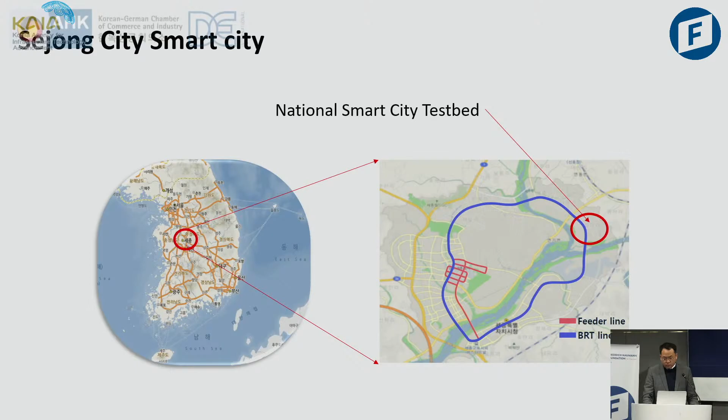Okay, so I want to introduce Sejong City first. Sejong City was originally designed as a new capital city of South Korea. We wanted to move our capital city to the Sejong area, but right now it is just a government complex, meaning that all the government offices are surrounded by this Sejong City. One more strength is that around Sejong City, most of the research institutes in South Korea are located in this region.

And the National Smart City Test Bed, you can see on the right figure, it's just one district, marked in the circle. So in this area, we're going to build a new city. The city will look like this.

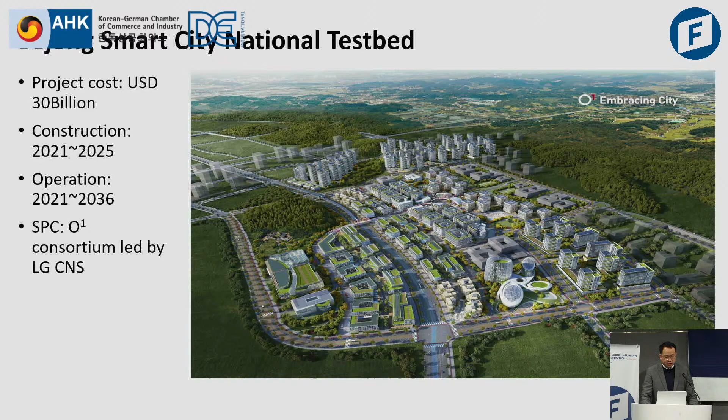The total project cost will be around $30 billion US, and the construction period from next year will be about 5 years. We're going to start operation from the year 2021 to 2036, and the business will be done by the O1 consortium, led by LG CNS.

In this area, we're going to propose 5 mobility services. The first will be personal mobility, using electric kickboards and bike systems. Then we will introduce shared mobility, autonomous shuttles, and demand responsive transits. And one more is smart parking.

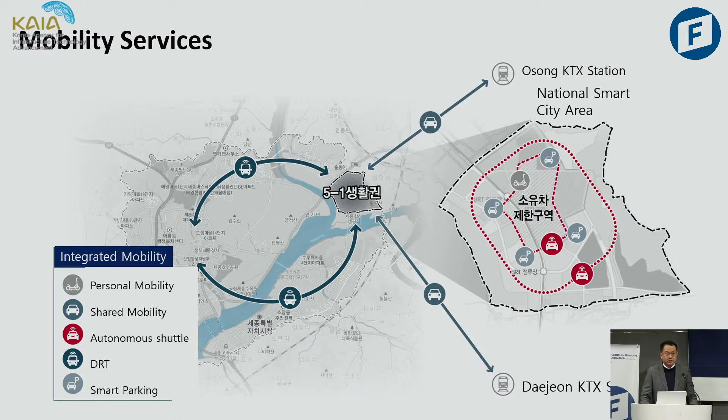In the 5-1 district, this is the smart city testbed area. Based on this area, we're going to plan the city transportation systems, and later we're going to expand the experiment to the whole Sejong City.

At the core of our effort, we have O1 link. This is an implementation of MaaS - mobility as a service, which I think European people are very familiar with. Using just one single application like O1 link, you can reserve, pay, and plan your trips. So with O1 link, we're going to provide multimodal services to everybody.

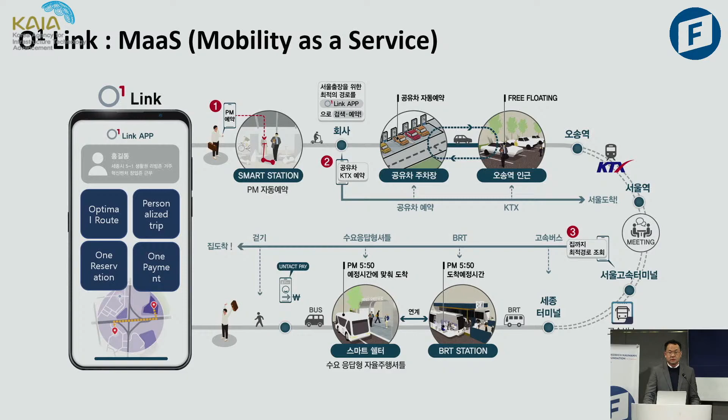From the 5-1 testbed location, one good thing is that we're going to open this O1 link platform to everybody. Meaning that if you are running a business and want to provide more mobility services, you can also use O1 link and join our network.

Under the O1 link apps, we're going to build the O1 mobility brain. This is the system that optimizes transportation and mobility using AI, cloud, and big data. I think this O1 mobility brain is the core concept of O1 link and this smart city.

So we're going to implement a mobility simulator to find the optimal travel, and also we're going to predict future demand and future traffic, and provide these services to the people.

Using O1 link, you can plan your intra-city travel using the 5 mobility services, and these services will be combined and integrated with the existing services in Sejong City, like the BRT (bus rapid transit), bus systems, and taxis. This will also support intercity travel.

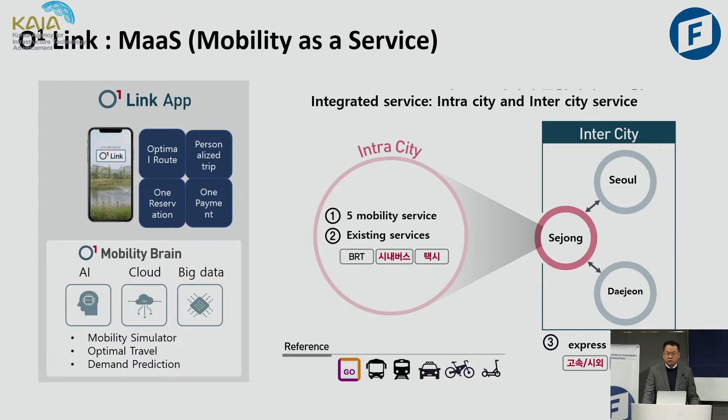So if you want to go to distant cities like Seoul and Daejeon, you can still use O1 link. Using O1 link, with just one click and one app, you can reserve everything.

For personal mobility, we already have some operated - some bikes, some kickboards, and micro mobilities. To improve the safety of micro mobilities, we're going to build a personal mobility roadway, separated from the pedestrian way, where bikes and kickboards can use this roadway.

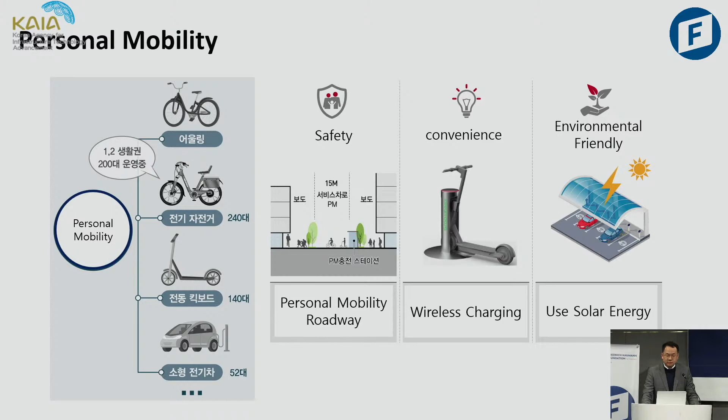For convenience, we're going to use wireless charging systems, and we hope that all the energy for electric bikes and kickboards can be provided by solar energy. What we aim is that the total energy consumption inside this testbed city - we think 40% of total energy demand can be provided by solar energy in this city.

To connect to the vicinity area - actually in South Korea, Uber-like service is prohibited, it's illegal. So we want a little bit different type of shared mobility. We're going to use rental car services. Around this area we have 5,000 rental cars available.

Using these rental cars, we're going to connect them with O1 link, and then people living in this testbed city can go to the vicinity area using these rental services.

We can also provide a one-way trip with free floating services, meaning you can just arrive at the destination and leave your vehicle, and the handler we hired will handle that vehicle so that they bring the vehicles back to the stations.

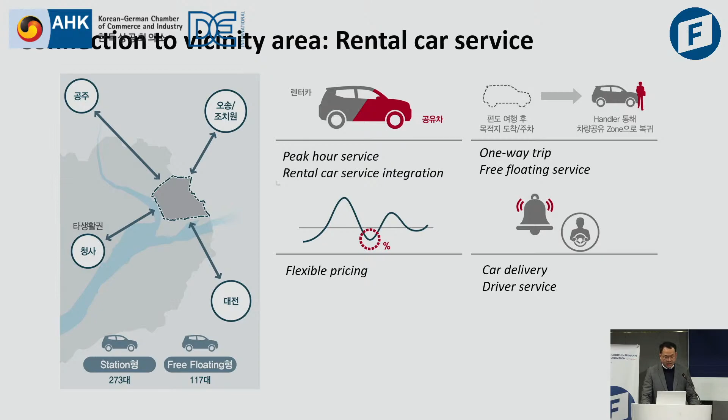We're also going to have more services like car delivery and driver services, and we're making flexible pricing strategies. We have two types of these services: the station type, meaning you can go to the station and get these services, and the free floating type, meaning you have to find the vehicle using the O1 Link app, then leave your vehicle anywhere and the handler will handle it.

And there is one more thing: the autonomous shuttle services. Inside this area, we are planning two autonomous-only lanes, and around them we're going to first run the shuttle services. This area will be connected by C-ITS services from the national government, using infrastructure-to-vehicle communications so vehicles can get more information from the infrastructure.

Along this roadway, we're going to install many sensors. We are designing a smart pole, which is a combination of sensors. We're going to use CCTV cameras, and LiDAR or radar if needed. That information will be delivered to the driver or the vehicle so they can avoid dangerous situations like collisions.

For security purposes, we're going to use blockchain-based security. We will also make a smart shelter bus station, which is an O1 link accessible point. So if you just go to these bus stations, even without any apps, you can reserve the services and get the service.

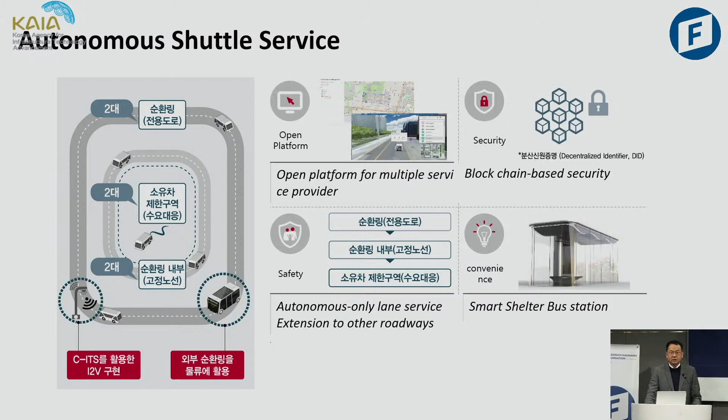These autonomous-only lane services will not extend to the whole city, because we aren't sure the safety is guaranteed yet. So we're going to do more experiments one by one, and once we have enough reliability, we'll extend these services to other roadways.

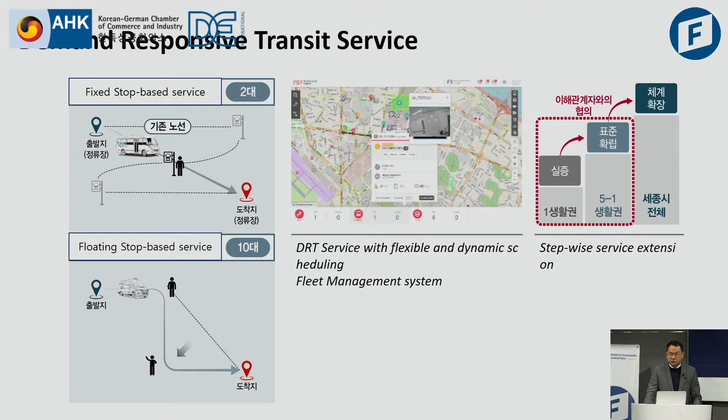We think one of the killer applications of mobility services is the demand responsive transit service. Demand responsive transit means you call the transit service, it picks you up, and delivers you to the location you want. We have two types: fixed stop-based services, where you go to a fixed stop location, and floating stop-based services, where you can call from anywhere and be dropped anywhere.

Initially, we are starting with 12 vehicles, but later, after analyzing demand and mobility situations, we're going to increase this number so we can provide the services to the whole of Sejong City.

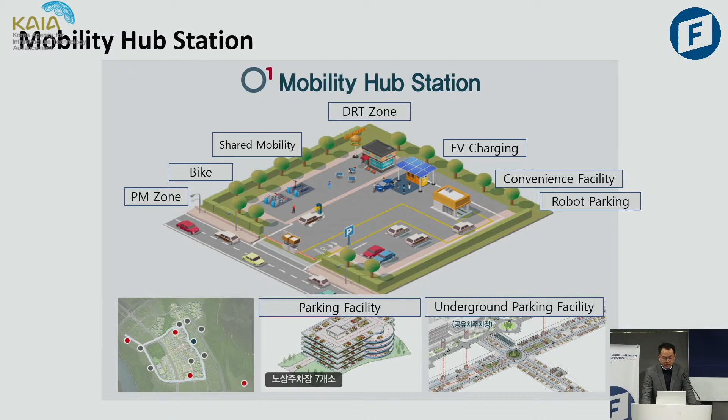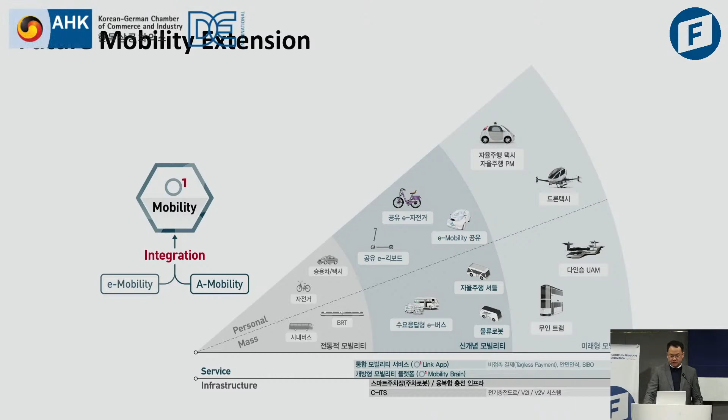Up to now, we are just starting with 5 mobility services, but later we're going to extend these to more advanced future mobility services, like autonomous taxis, drone taxis, UAM, and unmanned trams. These will also be tested in Sejong City later.

So up to now, I have shown you some services that we are planning for the Sejong Smart City test bed. But the question is, this kind of service is just like that — every city is talking about this. So what is the difference? And what is the implementation strategy?

To look at this, we have to rethink what smart city means. IT, data, information — people talk about this as just a smart thing, but I do not agree with that idea. I think smart means better decision-making or optimization. But how about the city? There might be different understandings of what a city is — living, lifestyle, history, all can be included as a city.

But here, from a management or engineering concept, I define the city as a system with many, many infrastructures. So what is a smart city to engineers? I think it's a decision-making system for urban infrastructure systems.

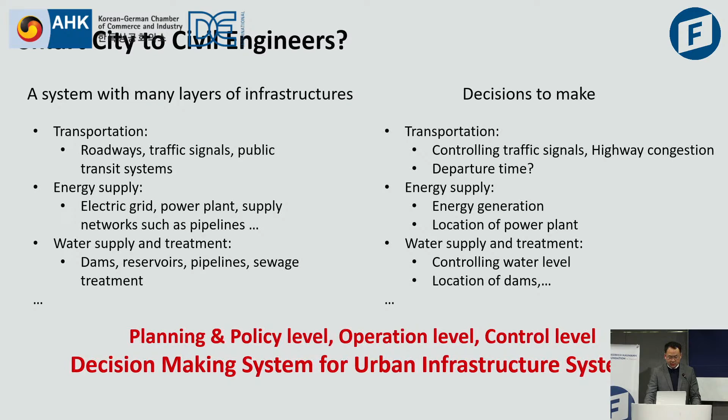So we have to make a better decision for the planning level, the policy level, the operation level, and at the very detailed control level. So this is my understanding of the smart city.

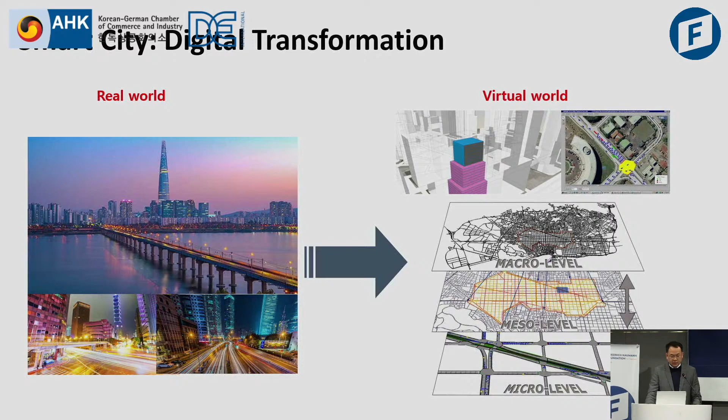To implement this idea, I think we have to build a digital twin. We want to make a digital copy of our city. So from the real world, we have to make maps and behavior models. But the problem is, how can we implement the digital twin?

Before we go into implementation, we have to talk about strategy - what kind of strategy we're going to use for infrastructure management. Up to now, infrastructure management strategies have evolved from reactive management to proactive and predictive. In the future, automated maintenance will be the theme. But right now, we have to focus on predictive maintenance or predictive management.

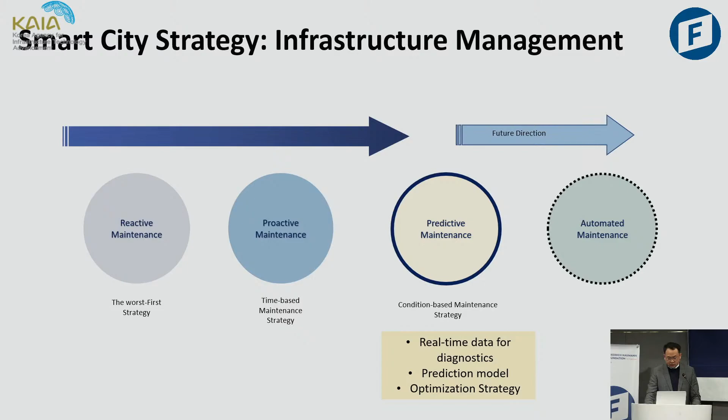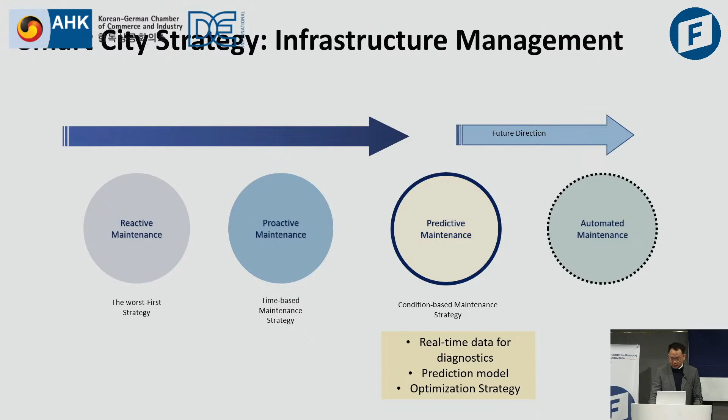In the predictive management strategy, we can use real-time data for diagnostics of our infrastructure system. We have to know the exact state of our infrastructures or services. Then we have to build a prediction model. Based on the prediction model and diagnostics, we have to set up an optimization strategy to provide the best service. To implement these ideas, we're going to design the mobility brain.

Up to now, so many digital twins have been focusing on building the data hub. But a smart city is not just a data hub. So how can we make a really good decision using this kind of data? We think we need more functions and procedures.

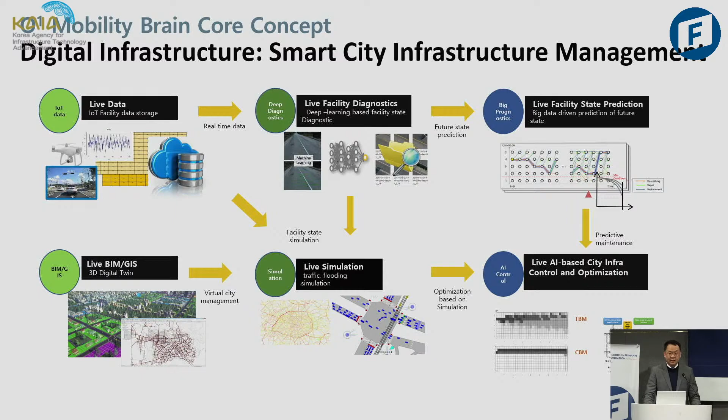The upper lines are for the data-driven approach, but if we look at the lower lines, you can see this is the model-based approach. As you know, if we have enough data, we can do a big data-based approach. But the problem is, if we don't have any data, or if there's some extreme or never-occurred event, then we have to do simulations.

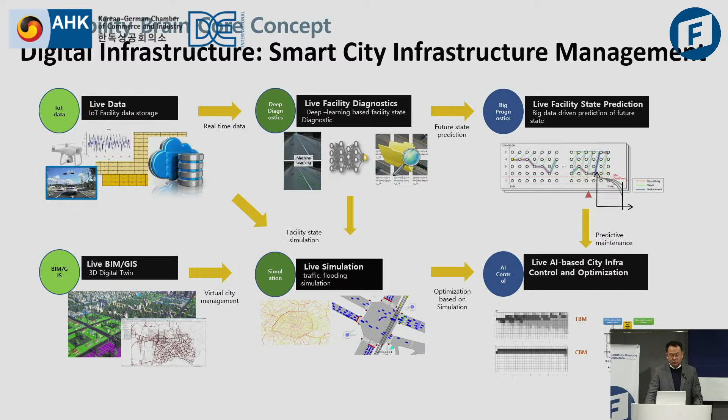I think the live simulation will be the core of this digital twin concept. Using these prediction technologies and data-driven approaches, we have to combine them together to get optimal control and optimization. To implement these ideas, we can think about some examples.

Then we're going to build a surveillance system for pedestrians. We want to know the crossing intention of pedestrians so we can avoid collisions. This kind of system is the basic one.

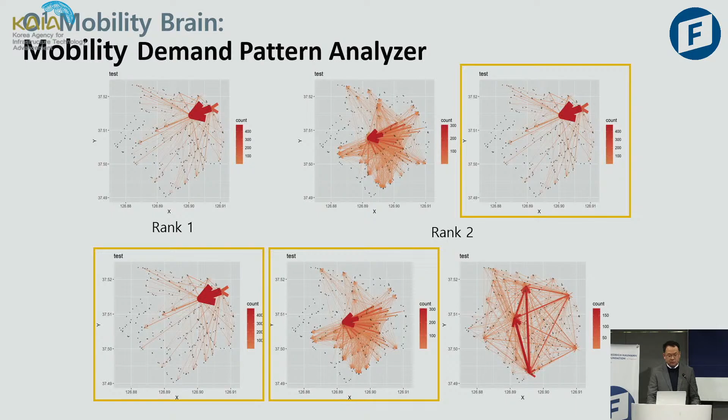Using this surveillance system, we want to get the whole mobility data, and using that information, we can implement mobility demand pattern analyzers. We can stratify demand into several ranks, so we can extract the crucial demand for services. This information will be used for the DRT route services.

And this information, we are using the DRT route optimizers. So at the real time, we are observing the people's movement and the traffic data, and then we're going to make real-time route optimizers.

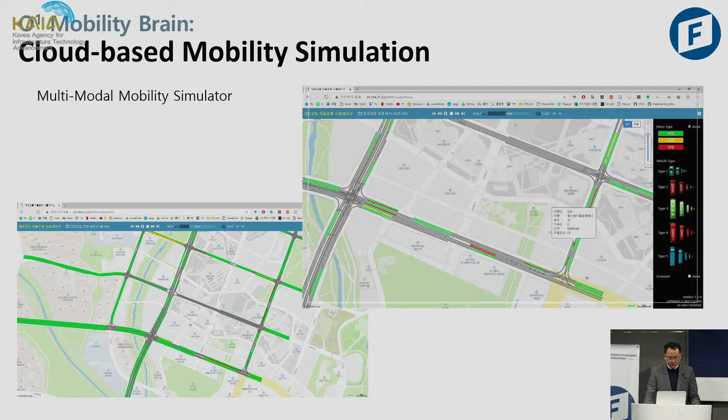Also, at the core of the digital twin, we want to build a cloud-based mobility simulator. This is the example of Sejong City. You can see that we are already building some HD maps, high-definition maps, for the autonomous vehicles in Sejong City. And so we are making some simulations. Using these simulations, we can get a much better route optimization result.

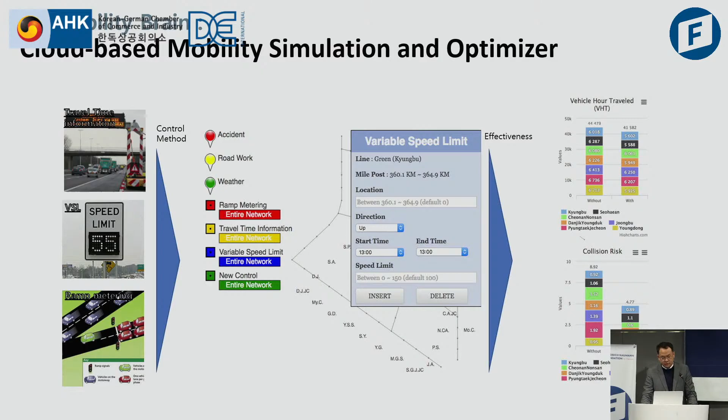Also, this kind of mobility engine can predict and control the infrastructure system. For example, if we want to set variable speed limits, then if there's an accident, road work, or weather situations, the simulator will give the best result for what is the best action for the control of the roadway.

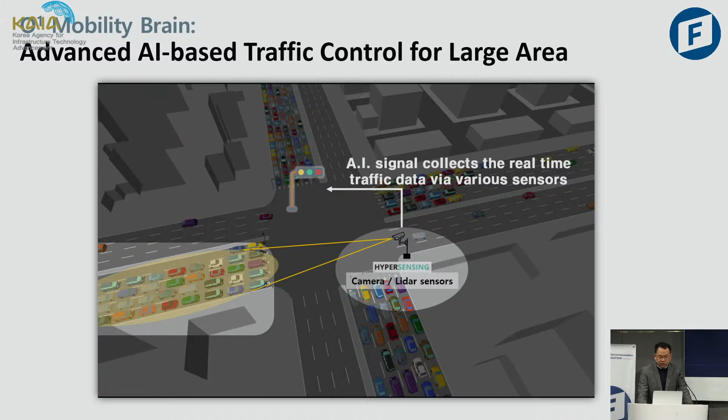The next one is advanced AI traffic control for a larger area. Using the surveillance system, we are observing all the vehicles, and then the AI optimizer is calculating what is the best option for signal control. But this kind of signal control will not just be a simple single intersection signal control.

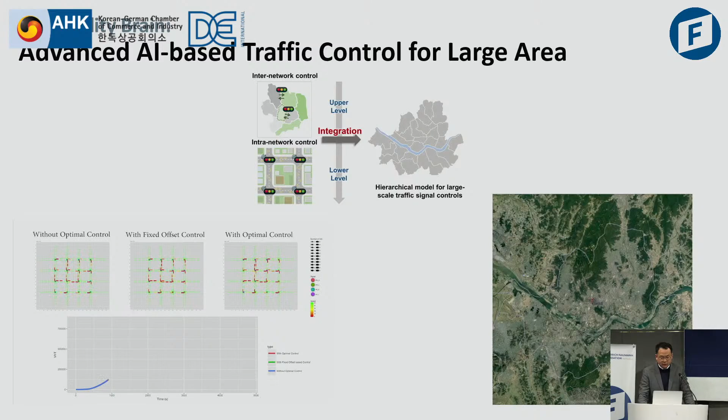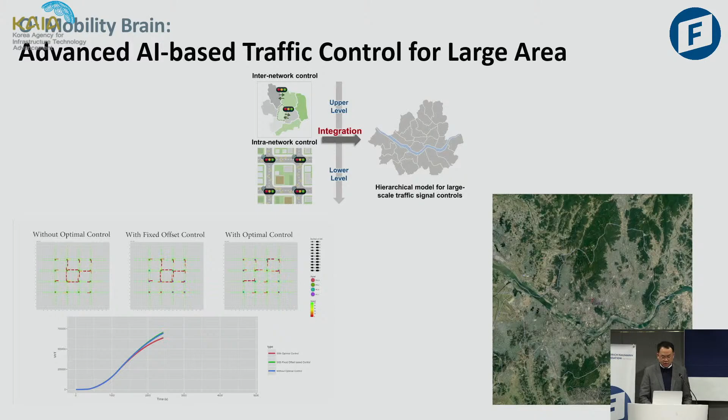So we're going to make a little bit of a higher level strategy, like this bi-level strategy. This means that we're going to divide the city network into several sub-networks. For the several sub-networks, we're going to optimize the interflow between the sub-networks, and we're going to optimize the intra-network signals. As you can see, we can reduce huge congestion using AI and this kind of approach.

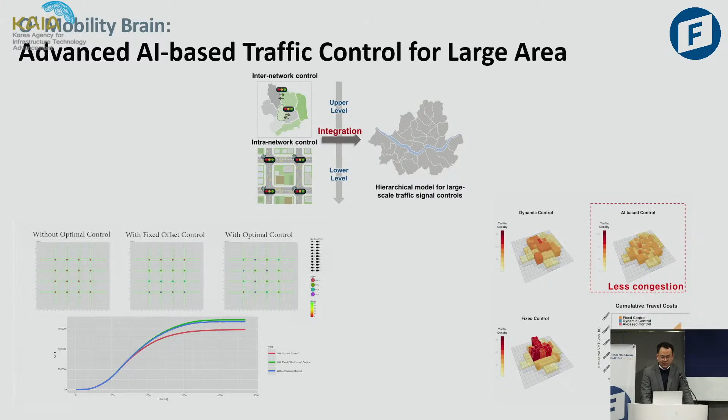And we think that we can reduce the very severe congestion in metropolitan areas using this approach.

And this is the last example of the KAIA mobility brain. This is the PMS, which is a representative system of the digital twin. Using drones, we can get images of the roadway, and then we can remove vehicles.

And then using some deep learning based method, we can do the diagnostics. So the computer will know whether the road area is dangerous or not. If there are potholes or cracks, or if there's some kind of hazard to the vehicles, it will detect it.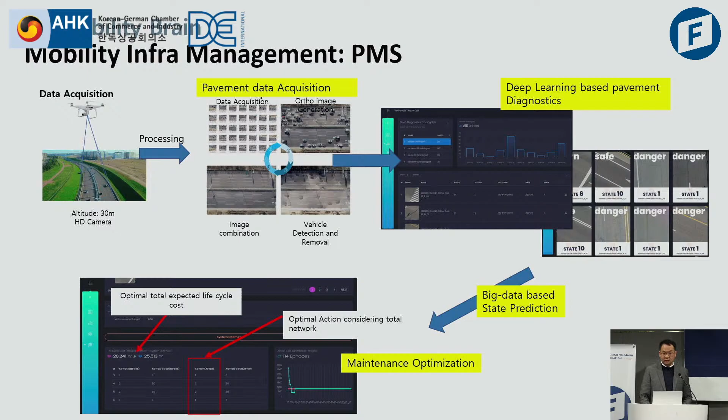And later, using this big data, we can do state prediction and give maintenance optimization. This means this will be implemented as an order for the maintenance workers. Okay, this is the end of my presentation.

I think Sejong City is the citywide living lab, so we're going to do a lot of experiments here. And what it pursues is that we want to have an open platform for business. So everybody who wants to join, I hope you can join this. You can just send me emails, and this is open for all types of collaboration. We're going to build a smart city research center inside this region.

And yes, some universities and research institutes will join this project. I think this can be a really good opportunity for Korea and Germany collaboration for the smart city. Dankeschön.

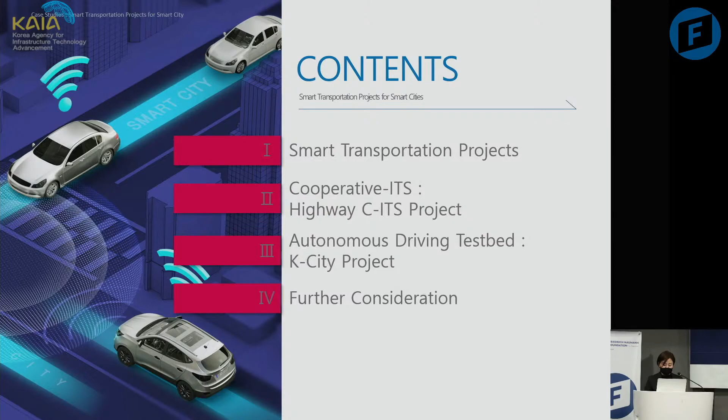Here is a brief summary of my presentation. Firstly, I would say the several types of smart transportation projects. Second, I would like to introduce one C-ITS project, which I have already done as a project manager. And the K-City project comes next, which is the test bed to evaluate automated car scenarios. Finally, I would like to conclude with further considerations.

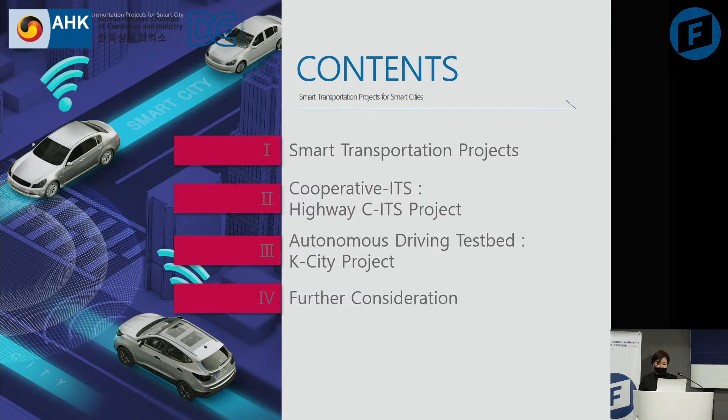As for the smart transportation project, I'd like to say the key factors between several types of projects. Here are the projects I wanted to introduce today. Those are the relevant projects which have already been done or are still ongoing.

So firstly, look at the left side of this project: K-City testbed, which was already done in 2018, and highway C-ITS project, which was done in 2019. And we are implementing the Daegu testbed in 2020. So let's talk about that.

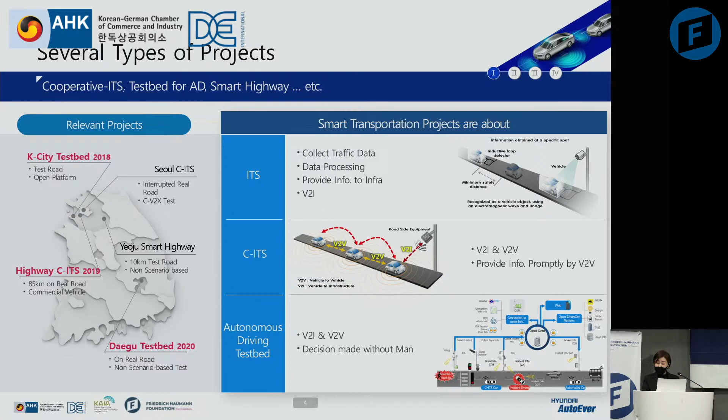The smart transportation projects are about... so you're already aware of the ITS project, which has already been implemented during the last 20 years. So what is the difference between ITS and C-ITS? The most key factor is V2V, vehicle to vehicle communication. And also the last thing is the autonomous driving testbed, which is decision made without a man.

Now I'd like to show the first case study, the highway CITS test project. This project was led by KEC, Korea Expressway Corporation, and here are similar projects which are already done or still ongoing.

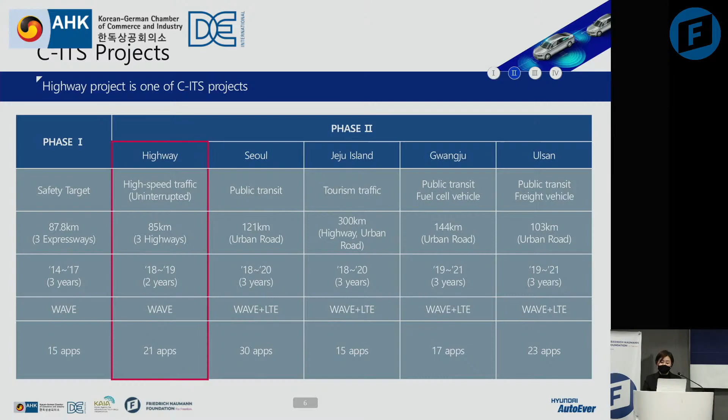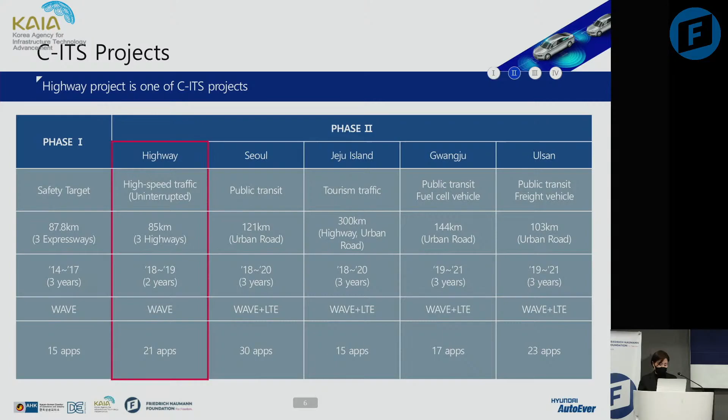So first, we categorized those CITS projects into 2 phases. The first phase is the Sejong CITS project, and the second is the highway CITS project already completed by Hyundai. Seoul, Jeju, Gwangju and Ulsan, the 4 metropolitan cities, are implementing this CITS project now, still ongoing, and my company and project team are joining that Gwangju project as well.

As a project manager, I have completed this project over 1 year. Let me introduce a brief summary of this project.

Project scope is 85.4 kilometers total length over a 1 year period. It has adapted wave network to communicate with 90 RSU and 700 OBU. Also, it has 17 incident detection systems to give dangerous information to drivers, as well as parking information system and 1 center system with hardware and software.

This project specially collaborates and combines 2 different systems: the previous ITS legacy system in KEC, and our new system. Combining these 2 different systems was really hard work, but we did make it.

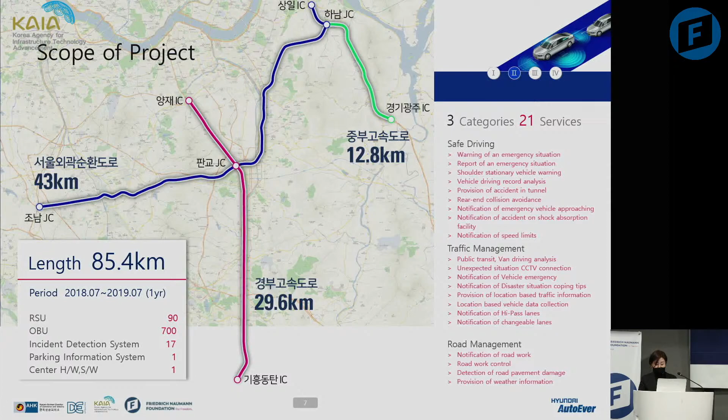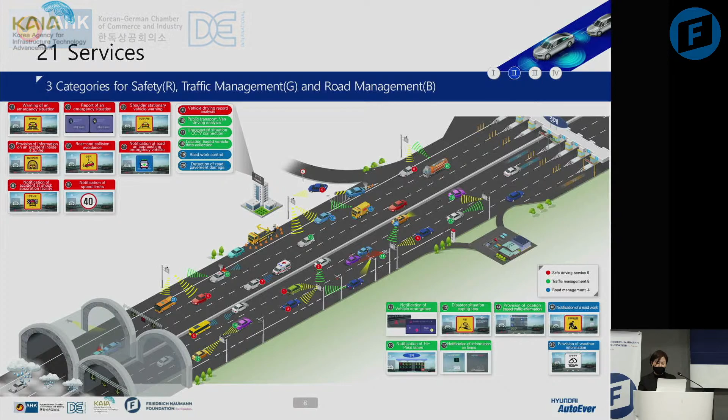This is a brief summary showing our services. There are 21 services in 3 categories: safety, traffic management, and road management. The red color means critical information for driving and safety. We implemented 9 services firstly, as well as green and blue services.

It doesn't look like a mandatory service. However, if you get information about road conditions and different event cases, then it helps your driving.

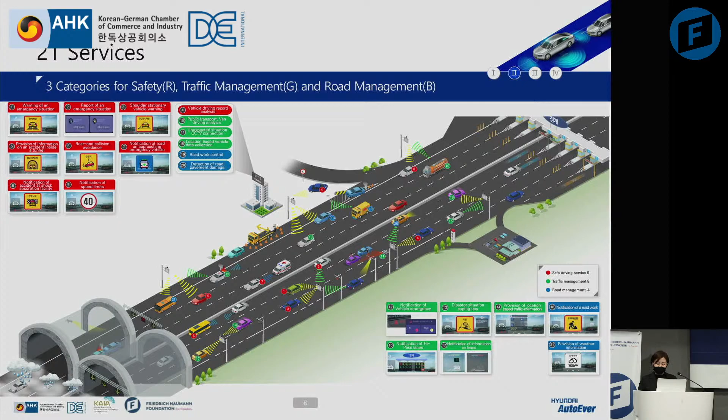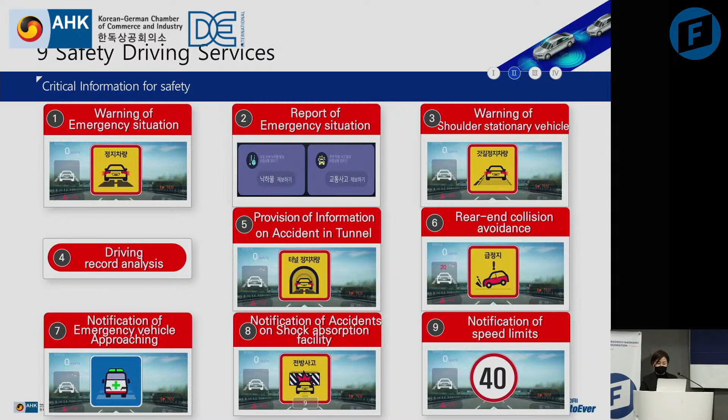I will not go into detail on these 9 safety driving services since you already know those. There are also 8 traffic management services and 4 road management services as well.

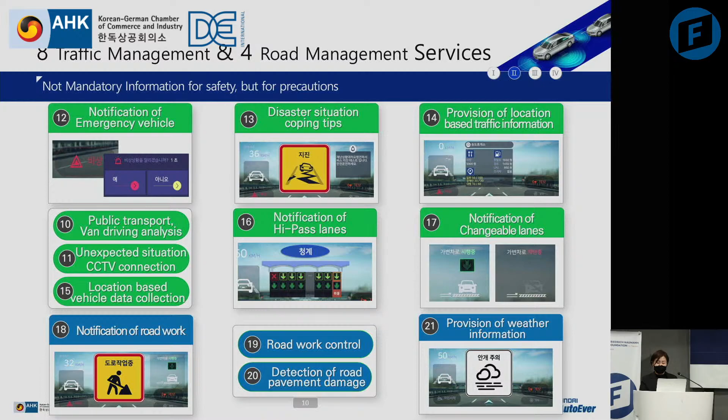Especially, we have 4 different types of tunnels and 3 different types of Hi-Pass toll gates as well, and a lot of different events happening on this road.

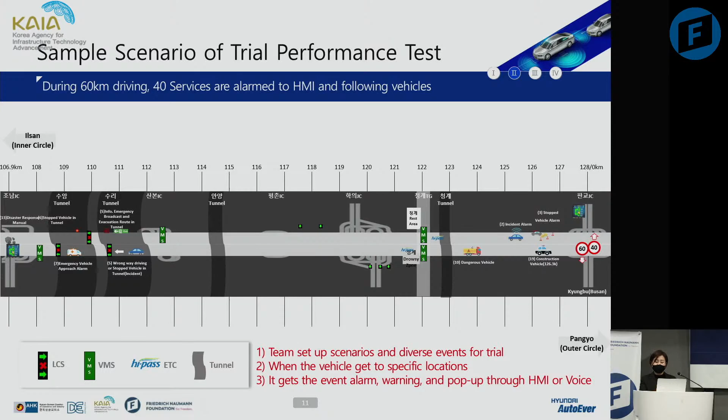This is a sample scenario of the trial performance test. After the project, our team set up scenarios and diverse events for trial. When the vehicle reaches specific locations, it gets an event alarm, warning, pop-up message through HMI and voice.

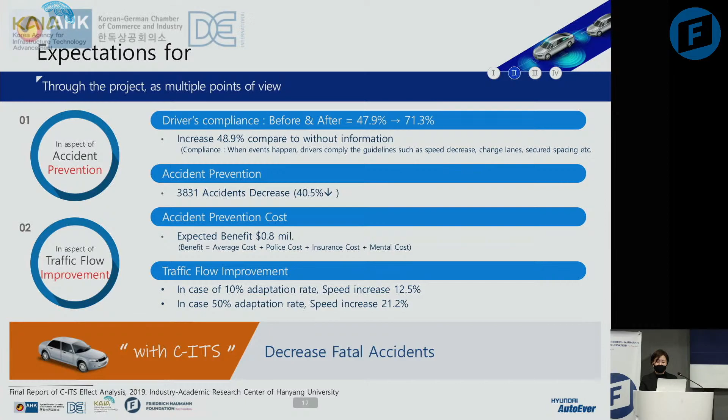Now I would like to show another project, which is totally related to autonomous driving.

When it comes to the K-City project, it is a testbed project to evaluate automated vehicles based on systematic scenarios. So whoever wants to test their automated car can simply make their own scenario to test performance.

Let me show you a simple video clip to introduce that system. This is the physical area where this system is implemented.

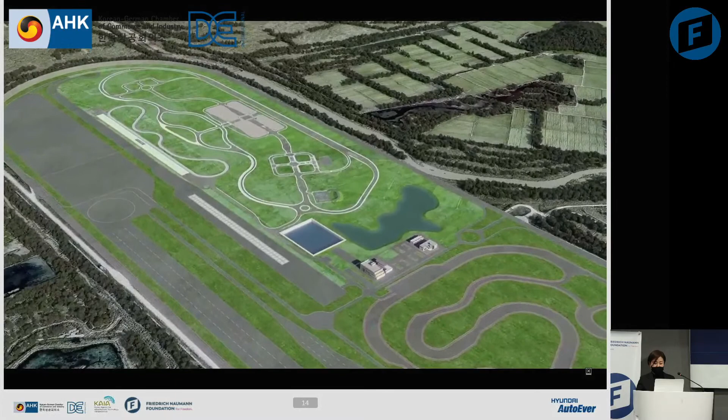This site has a community road, CBD road, as well as an exclusive motorway, outer road, and auto parking area.

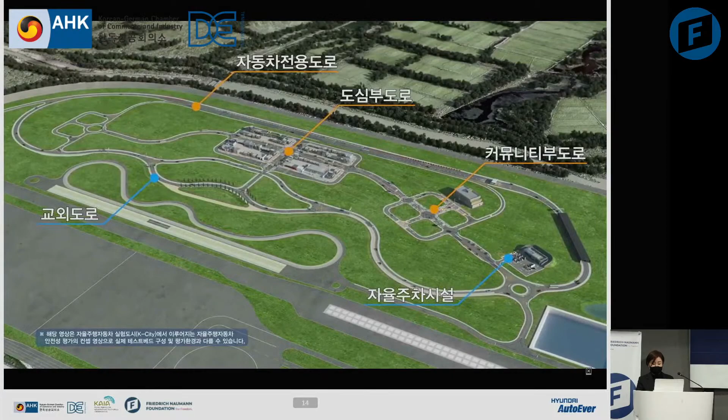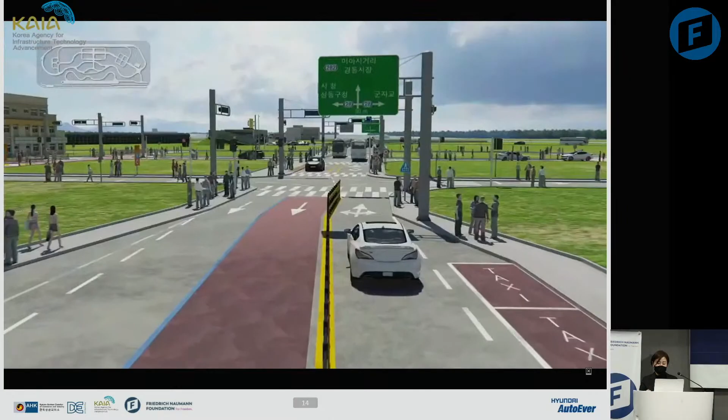Now you can see the simple subsystems that can be tested during the drive course. Firstly, you can combine signal intersection information, and also test the conflict effect with incidents.

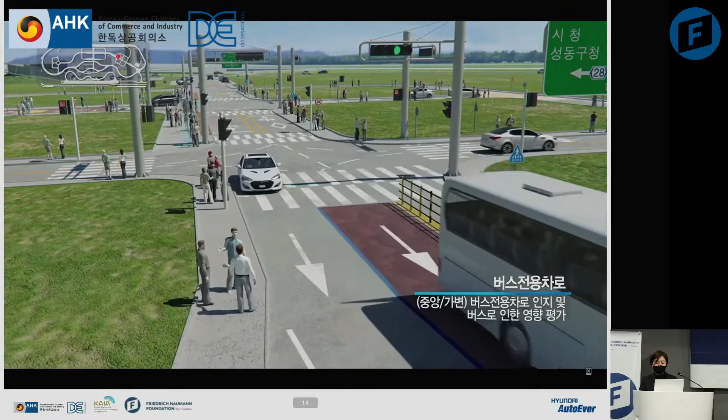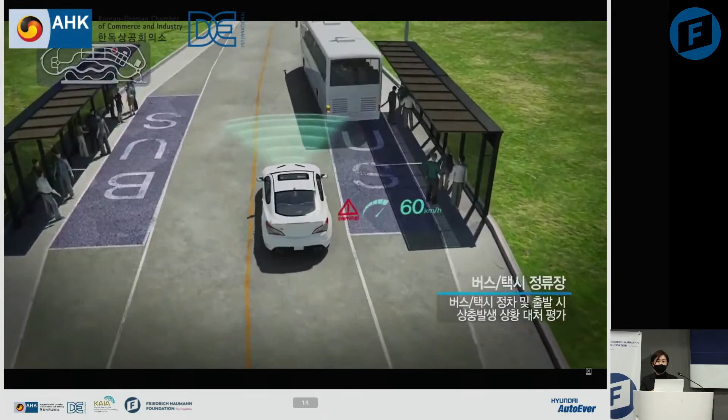This is the bus lane, where autonomous cars could be tested for that kind of conflict as well. And here is the CBD road, which has a shadow area with high buildings.

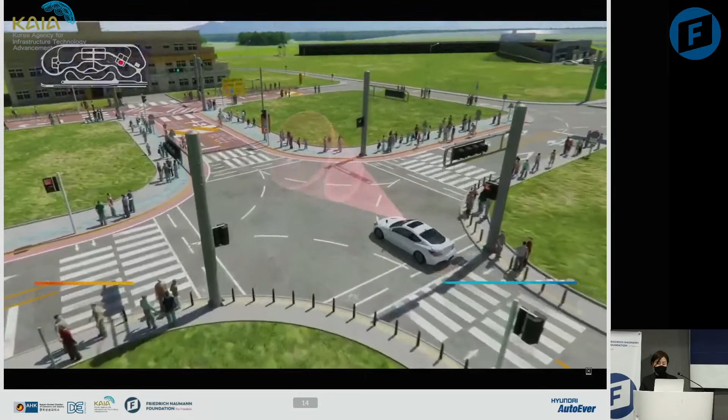This is a special zone for pedestrians as well as children, so you can test the conflict between pedestrians and small kids.

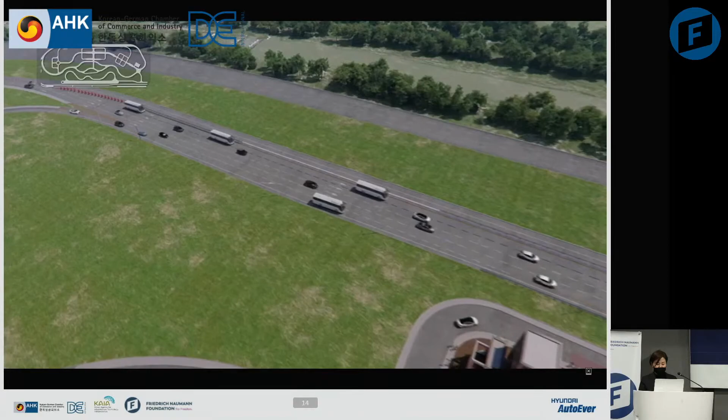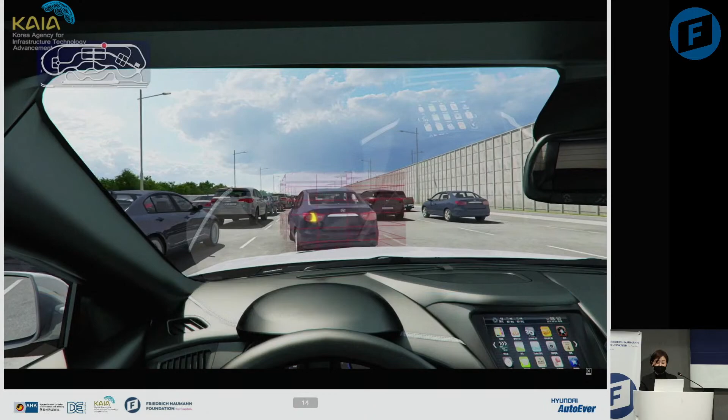This drone shows the exclusive motorway course, where you can test the autonomous driving support system, ADAS. You can also test ACC, as well as this Hi-pass toll gate.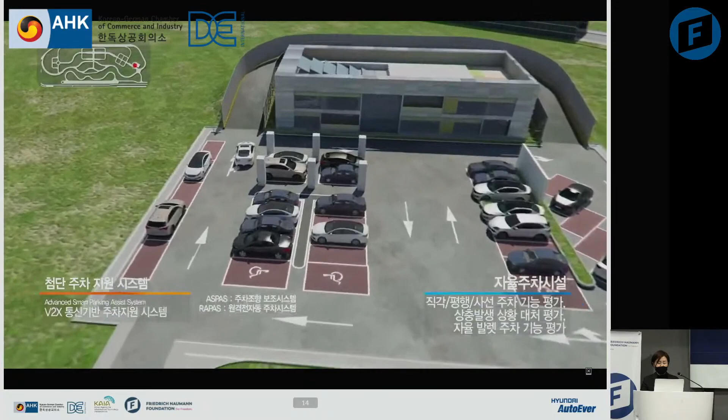And almost lastly, that is the advanced smart parking assist system, so you can assess that kind of system as well.

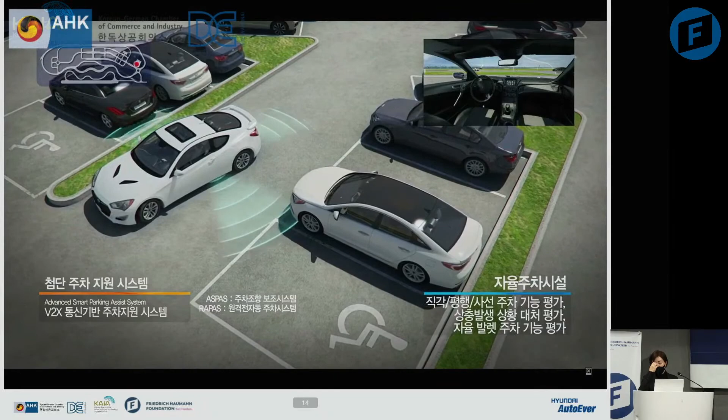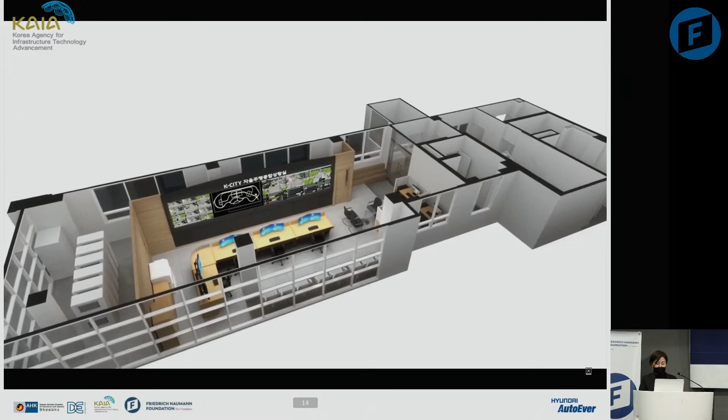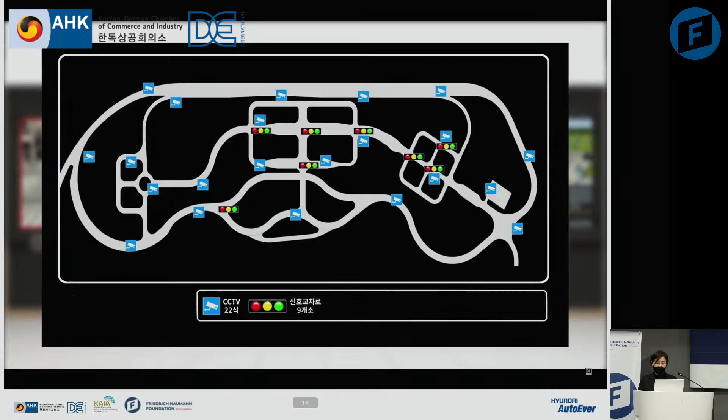And also this system has the control center as well, CCTV and traffic signal, and also the RSU and LCS kind of systems.

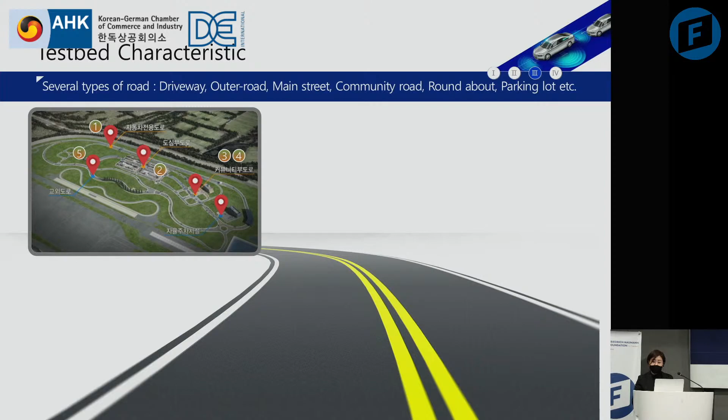Let's stop this video. Let me show you a simple explanation for that.

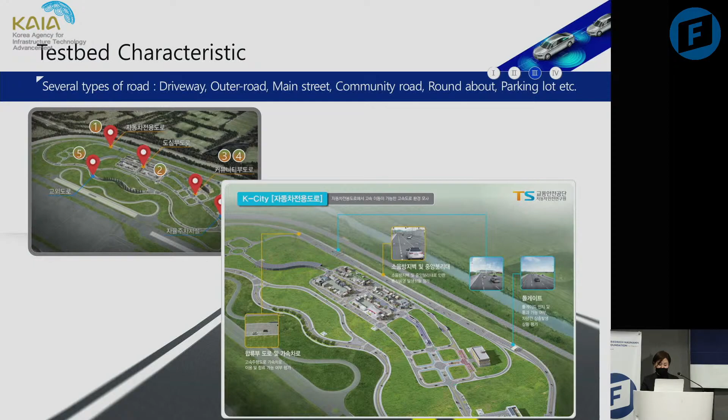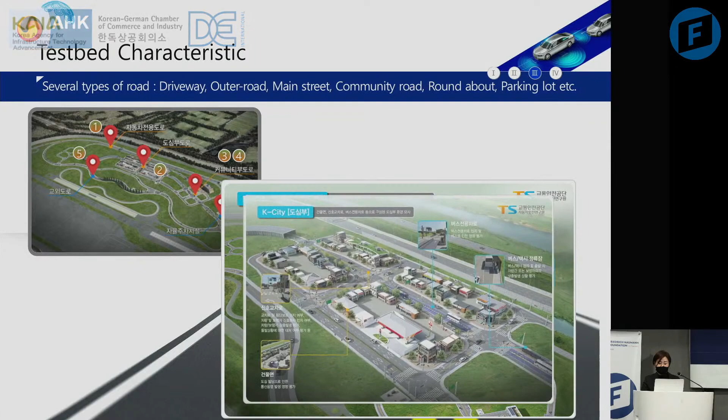This shows the features of the physical site design. This course has diverse road types as well as specific situations. This is exclusive motorway, and that section is the CBD area, which can be tested for the signal area and bus lane and bus taxi stops and so on.

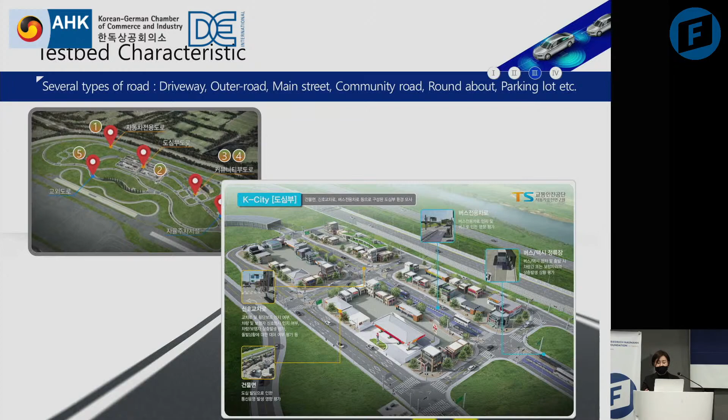And this is community road as well. You can simply get the events in the school zone and pedestrian and bicycle and road parking system.

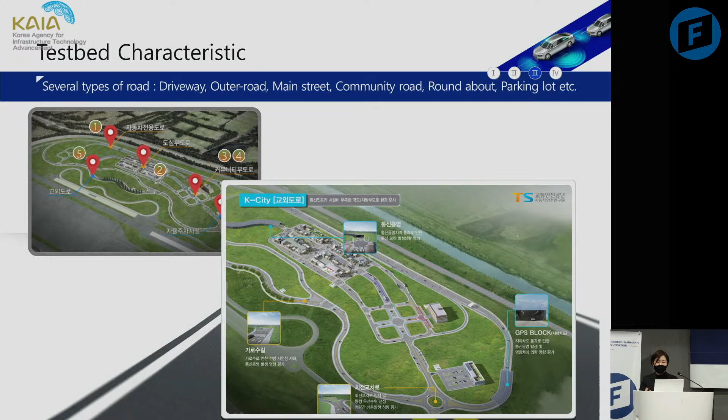Also, this is outer road, which can have multiple shadow areas because you can test the telecommunication network service quality as well. And this is the testbed details. You can assess performance under dynamic events with various conditions.

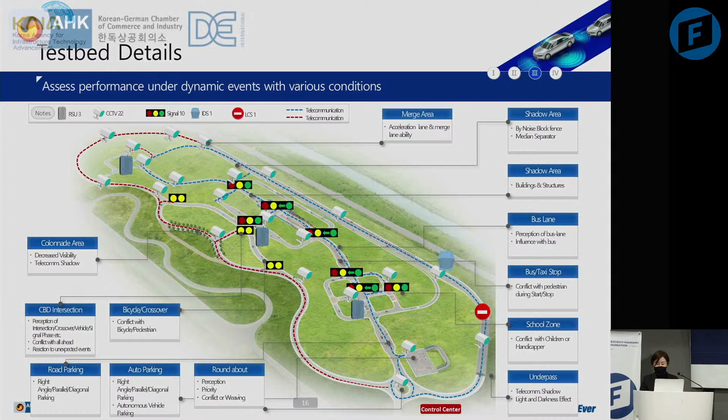And this is further consideration. Hopefully, we should follow the standards and technologies. Those things should be arranged, and we should follow those things. So,

especially for the standard, for the specific condition, road condition, and also we needed to develop diverse test assessment and scenarios as well. And also we should follow some standard map, such as LDM.

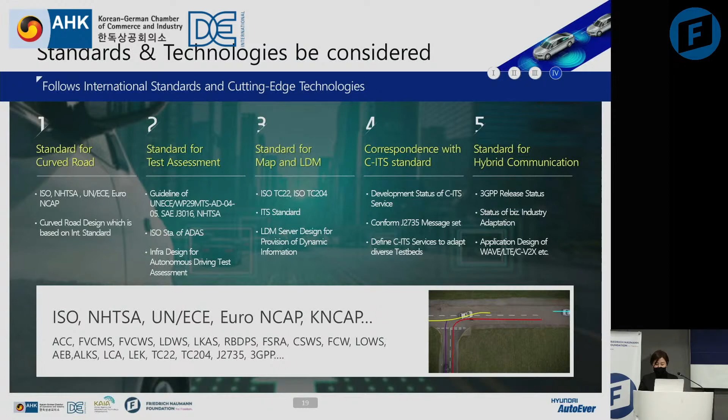And also we needed to have correspondence with C-ITS standard as well. Also, we have to consider that hybrid communication network. So that's all for today. Thank you for your consideration, and as well as your dedication. Thank you.